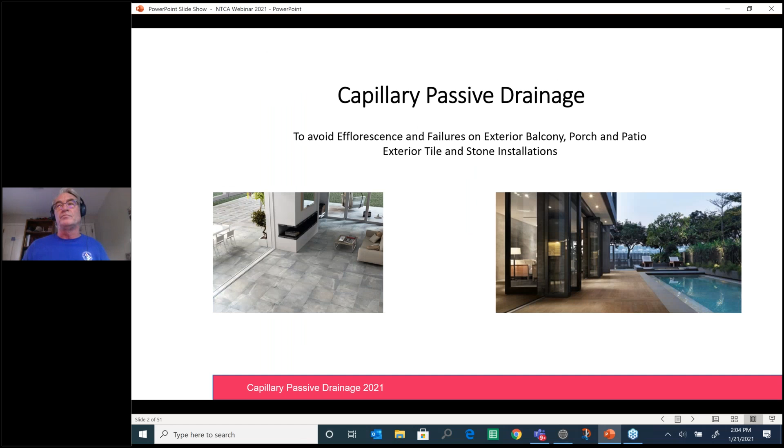To avoid efflorescence and failures on exterior balconies, porches, and patios, you want to make sure your installation includes a capillary passive drainage system.

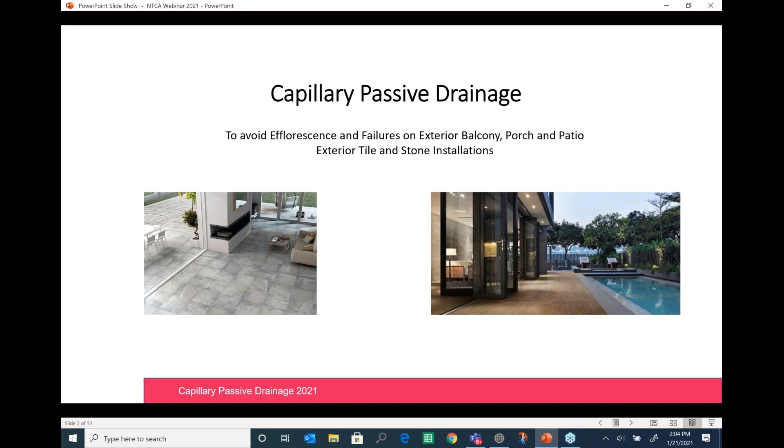Natural stone and porcelain pavers are popular choices for landscaping options, for patios, pool decks, sidewalks, and balconies. These installations will encompass porcelain as well as natural stone that are thicker than the traditional tile we would install on the interior. These tiles and natural stones are typically from 2 cm, which is 3/4 of an inch, up to 7.62 cm, or 3 inches.

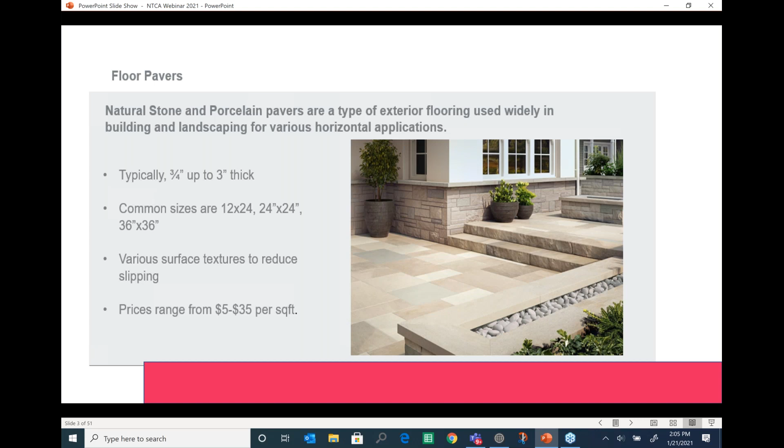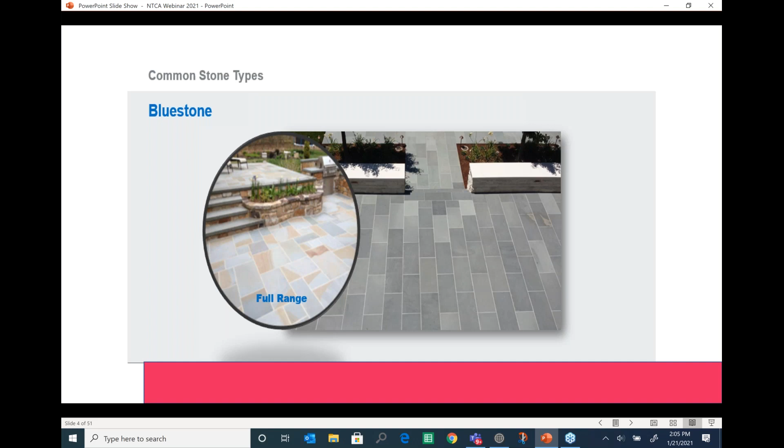Some popular options could include bluestone, quartzite pavers, as well as sandstone pavers.

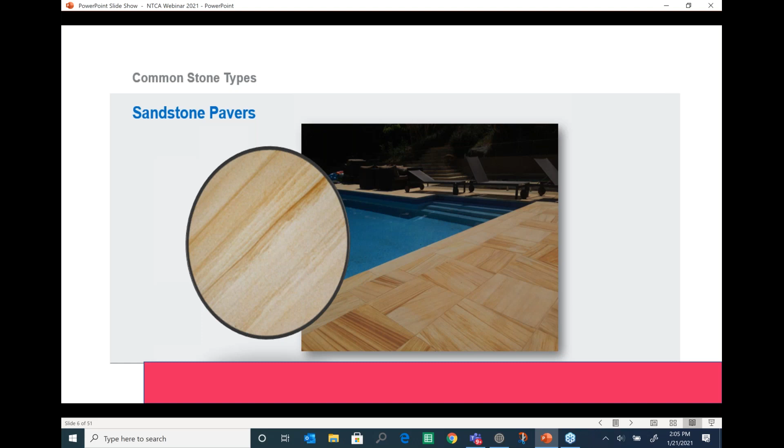Porcelain pavers are made from clay, sand, and feldspar. Porcelain is a very strong and dense material. It resists scratches and has a very low water absorption of less than 0.5%. The low water absorption restricts the amount of water that may cause freeze-thaw issues, especially in Northeast climates.

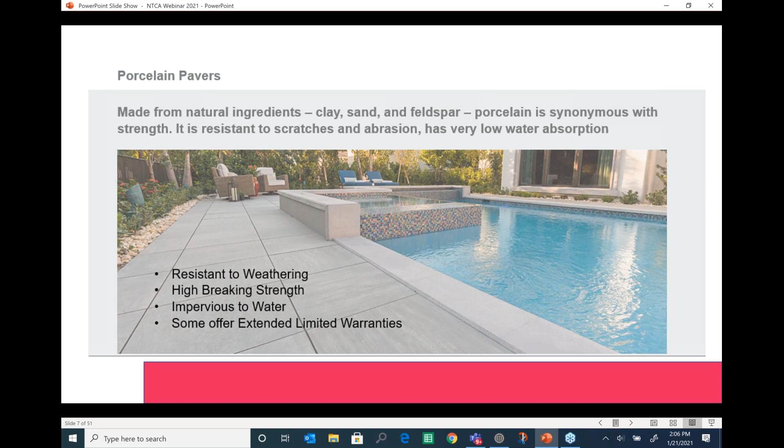COVID-19 has changed the way we use our homes. Today's homes are now our schools, offices, as well as family and entertainment spaces. Now more than ever, people are choosing to invest in outdoor spaces to increase the size and usable space for their current environments.

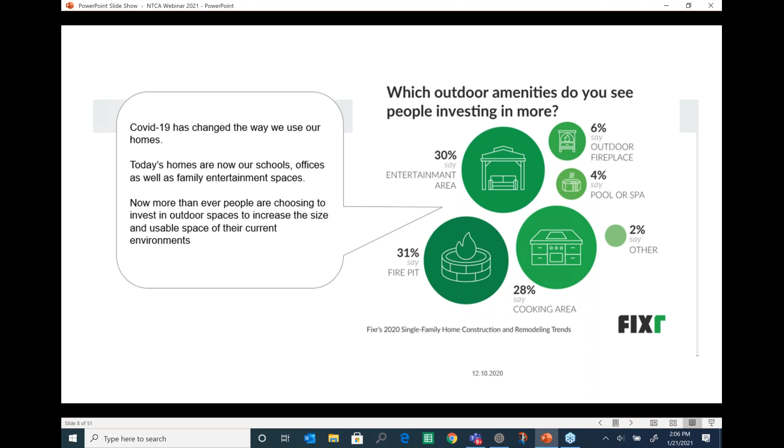The market is growing and rapidly changing. We continue to expand into outdoor living spaces. We're going to see an increase in 2 cm porcelain natural stone pavers. Also, large format tile is getting more common for exterior applications, not only for horizontal applications but also vertical applications. There's a growing request for fast and proven installation systems.

We're going to face some challenges. Most exterior tile and stone installation systems are inadequate and do not address many of the common challenges. Installation products and techniques vary by region and are not always suitable for harsh climates. There is limited education in the market that addresses these concerns.

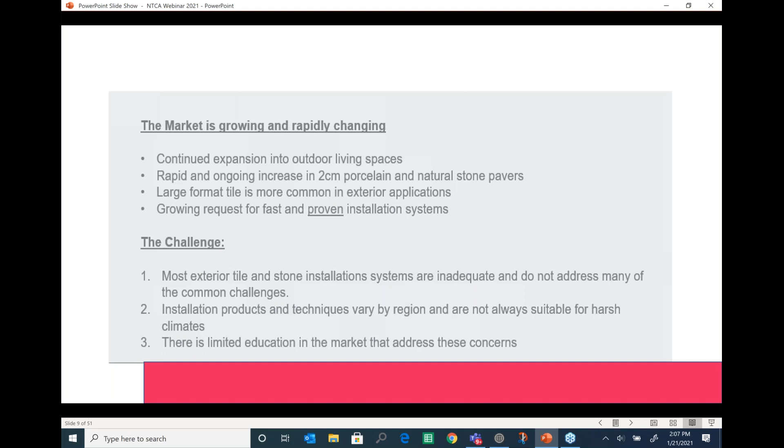Let's take a look at traditional installation options. We have the thin bed method, which uses a direct bond with a thin set mortar. We also have a bonded mortar bed—this is a dry pack bonded to the substrate with a slurry bond coat at a typical thickness of approximately 1/4 of an inch up to 2 inches. We also have an unbonded mortar bed, which is a dry pack installed over a slip sheet or cleavage membrane at a thickness of 1.5 inches up to 3 inches.

We also have the last option, which is a dry set or a sand and gravel installation.

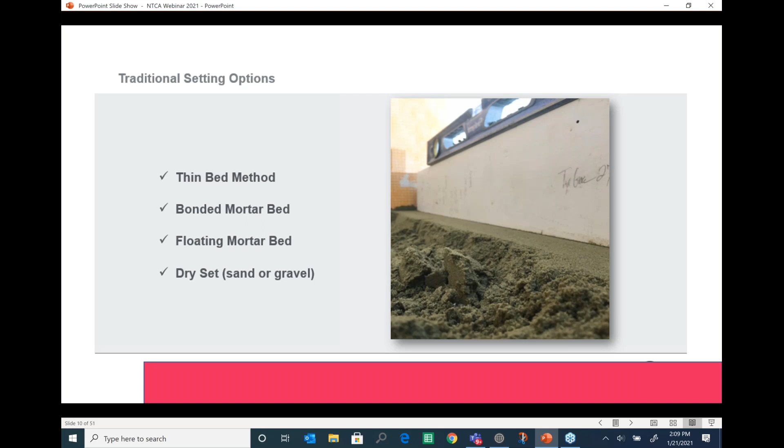The thin bed application, or direct bond method, is for slabs on grade construction where no bending, deflection, or stresses occur. A thin bed installation is desired for those types of applications. The substrate must be within tolerance and able to receive a cementitious adhesive.

Anti-fracture as well as waterproofing membranes are optional, and a lot of times they're overlooked. You always want to incorporate your movement joints according to the TCNA EJ171.

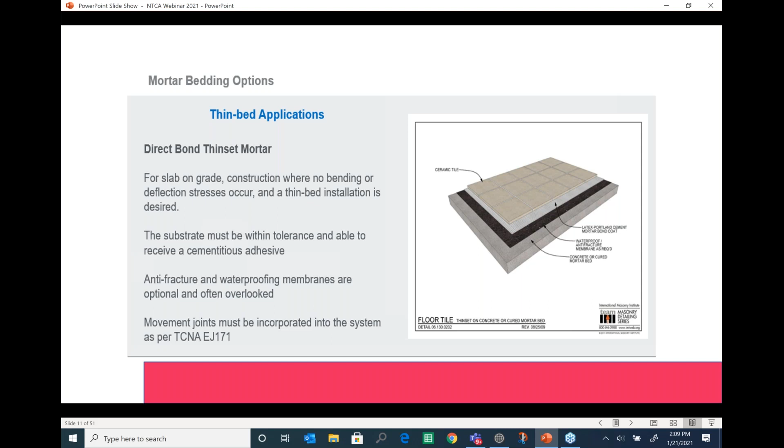For a bonded mortar bed application, you want to use it where areas need to be leveled, flattened, or contoured. A bonded mortar bed can go from thicknesses anywhere from 1/4 of an inch up to 2 inches in some cases. When floor flatness is critical, such as with pavers that have single edge dimensions greater than 15 inches, a bonded mortar application is critical.

Again, using an anti-fracture or waterproofing membrane is optional, but sometimes it should be considered to help the overall assembly of the installation.

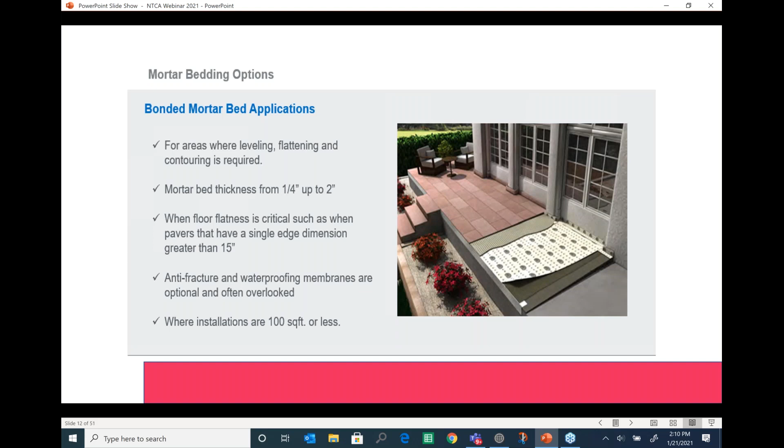There's also an unbonded mortar bed application when you have to go for a thicker installation to hit a certain elevation. Those mortar bed thicknesses range from 1.5 inches up to 3 inches, and sometimes thicker, depending upon the materials being used.

It's used for leveling, flattening, and contouring. You would use a slip sheet or a cleavage membrane to separate the mortar bed from the slab. It's completely unbonded from your existing substrate. Again, an anti-fracture or waterproofing membrane, an A118.10 or A118.12 product, should be looked at when installing these types of stones outside over either a bonded or unbonded mortar bed.

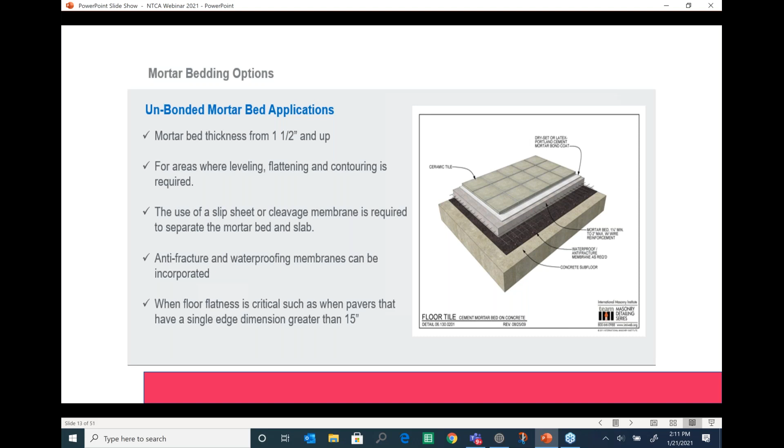So there's two types of mortar beds that we just talked about, and you can do them in a couple different applications. You have the float and cover, where you pull your dry pack or your mud, smooth and finish, and let it harden, then come back later and install your stone or tile. If you're using a porcelain paver or a stone that is very flat and gauged, this is a very common installation practice, using a float and cover application.

A wet set, or live set, is usually used when you're using a larger stone or an ungauged slate or another type of stone, where setting the stone into the wet, live mud and beating it down to a certain level is required to get that floor or finish flat and level.

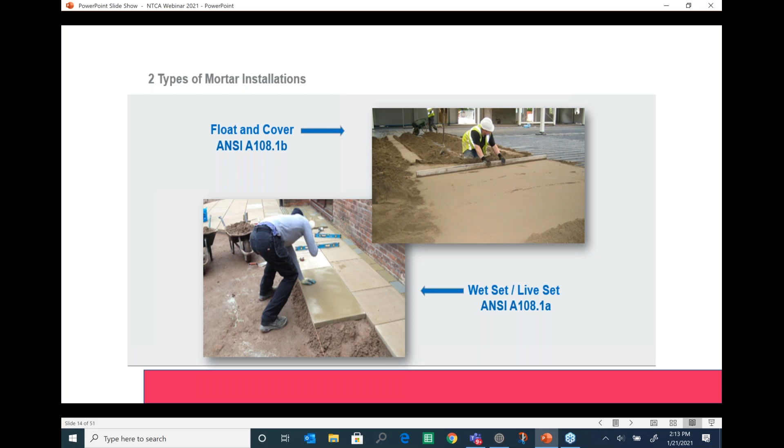Also, you have the dry set method. Here are two examples of a dry set method. These are typically used for landscaping applications out in the yard, where you either take gravel and apply your paver right to the gravel, or compact your gravel and put a layer of sand on top that you screed off to a certain flatness and elevation, and then install your pavers.

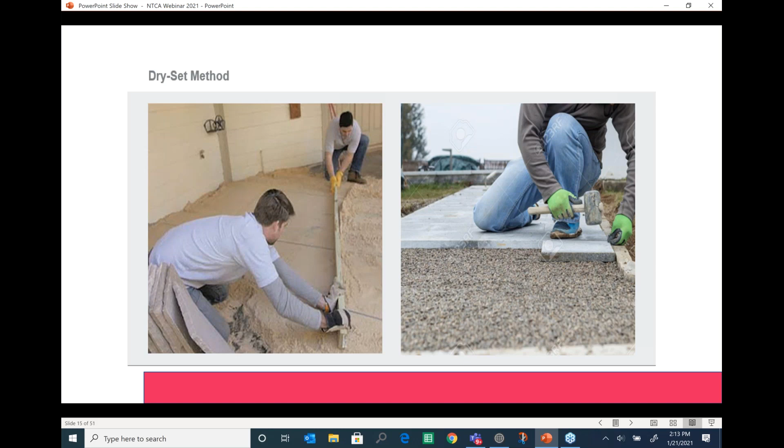So when we're talking about exterior installations, we have to take into consideration expansion and contraction issues. A screed can expand twice as much as a ceramic tile.

With surface temperature changing dramatically, from possibly having a nice sunny summer day and then a storm shows up and the rain comes down, you can have a dramatic difference in surface temperature in a short span of time. And what happens is your substrate, which includes your tile as well as your mortar bed or concrete substrate underneath, will contract as that substrate cools down.

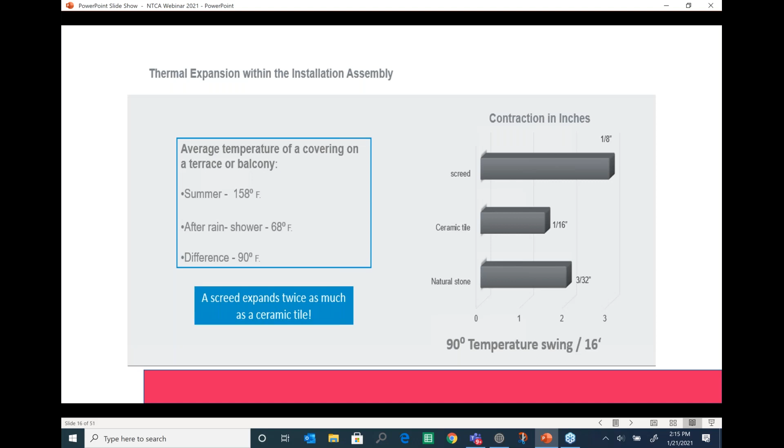So you must have accommodations for movement joints in your installation to allow for these substrates to expand as well as contract. Most of us have seen the yardstick example of a substrate shrinking or contracting, causing the yardstick to rise up in the middle. Well, this is exactly what happens when a tile assembly shrinks as well.

You will get tenting of your tile or stone and delamination. This is common for exterior applications. That's why you have to take the necessary installation practices, as well as your soft joints and movement joints, into consideration when you're planning out your exterior project.

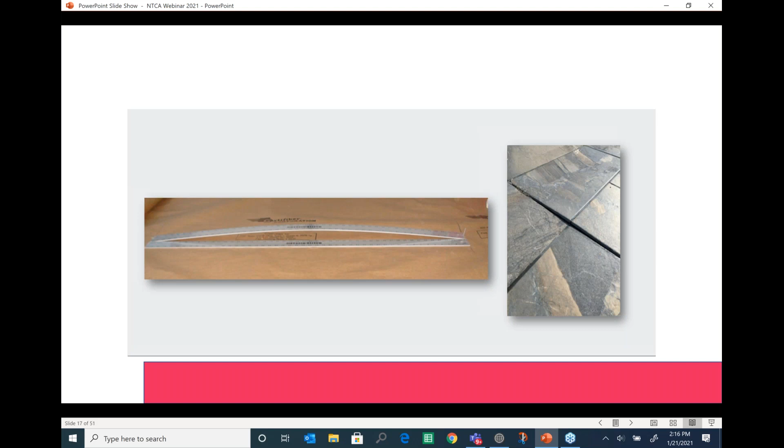Older installations included smaller tiles that offered more joints to help accommodate movement. However, the trend towards larger format tiles with less and smaller joints has increased the complexity of exterior tile installations.

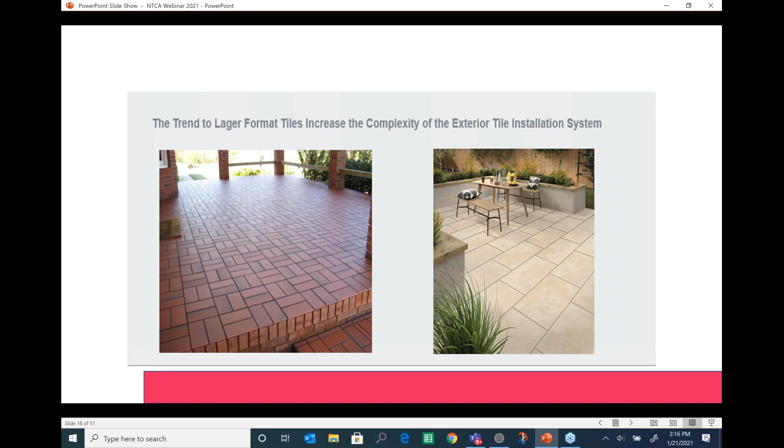Larger porcelain tiles equate to less joints, which means less expansion room, which increases the risk of cracking, heaving, and disbonding.

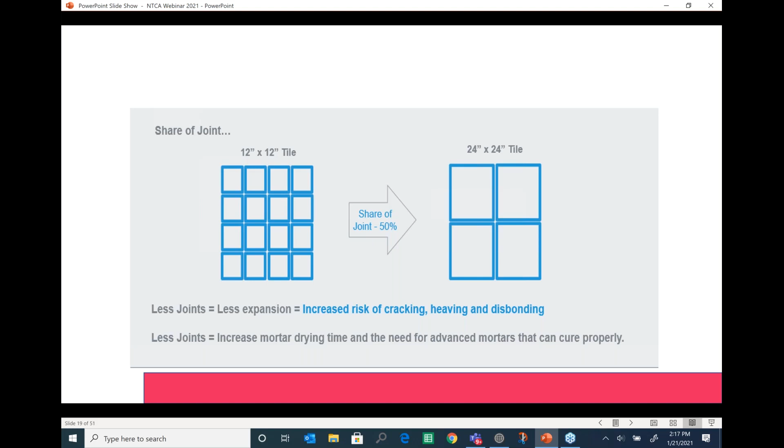When we look at other environmental effects on a tile assembly, we must also consider the combination of moisture and heat and how they negatively affect a tile and stone application over time.

When it rains or even when it snows and the snow melts, that moisture is going to get into your grout joints, penetrate the assembly, and sit in the cement, the grout, the substrate, and unless there's a good drainage mat in place, that water is just going to sit there. Some of it will evaporate, but most of it's going to just stay there.

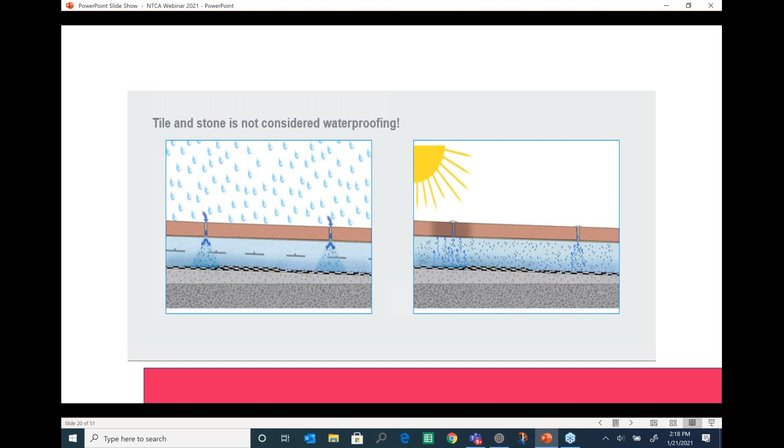Then what happens is when the sun comes out, it's going to basically cook that installation, causing that water to come to the surface and bring all the soluble salts with it, or efflorescence.

Even when an assembly has drains in it, if it's not set up properly to direct that moisture to the drain, then it's just like not having drains at all.

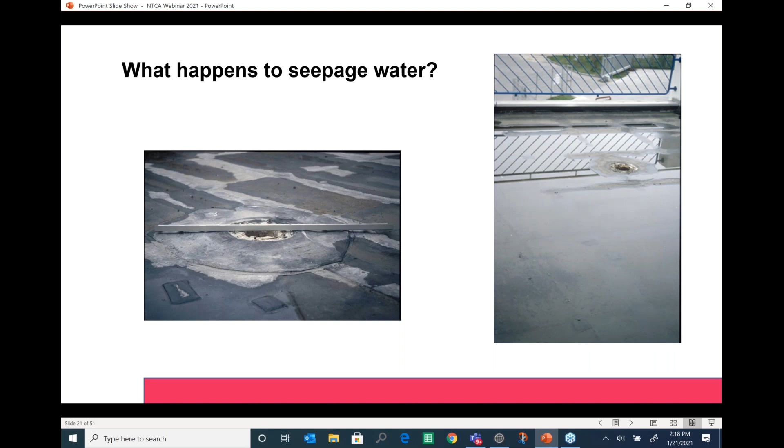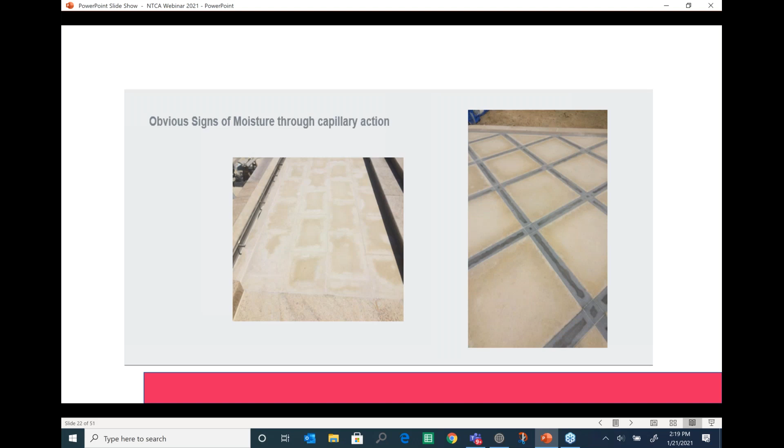This is what happens when that moisture is trapped underneath a natural stone. We see ghosting, we see moisture stains, we see efflorescence.

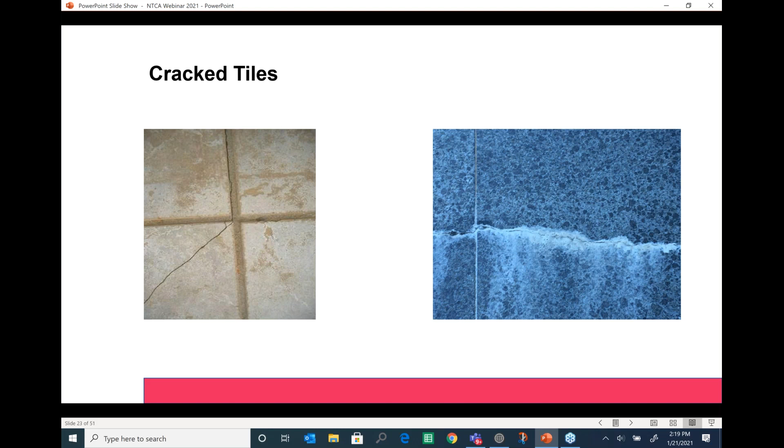Freeze-thaw effects of that moisture being trapped also cause tile and stone to crack. In most cases, an unsightly white efflorescence will come up through the joints to the surface of the finished tile.

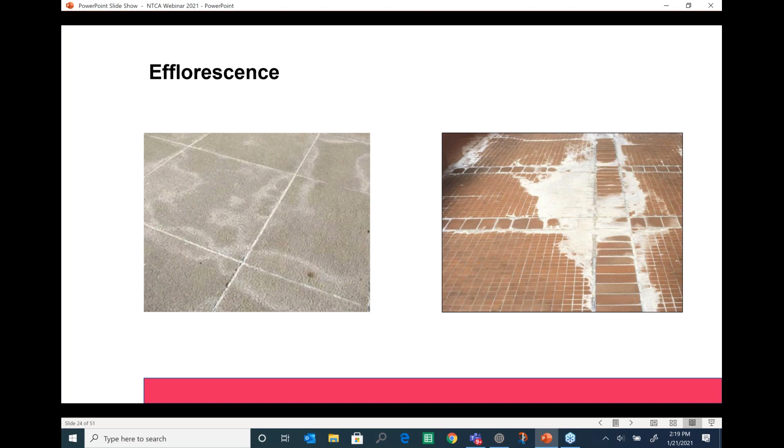Here are more examples of moisture trapped in the assembly. There's a large investment in these types of installations. To have a finished look like what's shown in these pictures would be devastating for a homeowner or building owner after they spent a lot of money to have their dream exterior patio built.

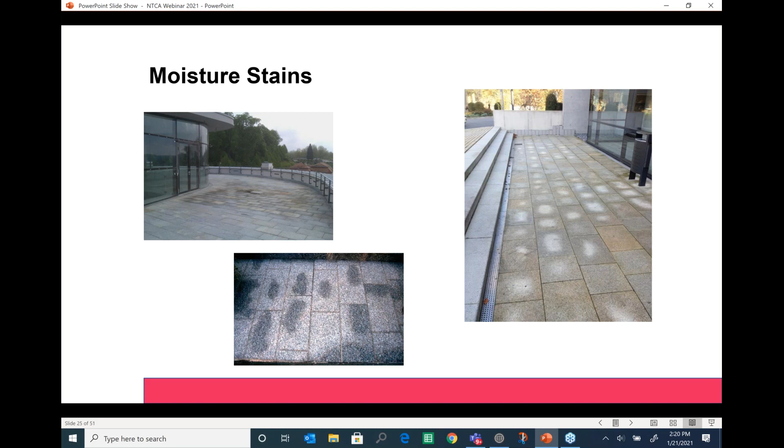If you have an open joint installation and that water's trapped, then this is possible. Another unsightly situation.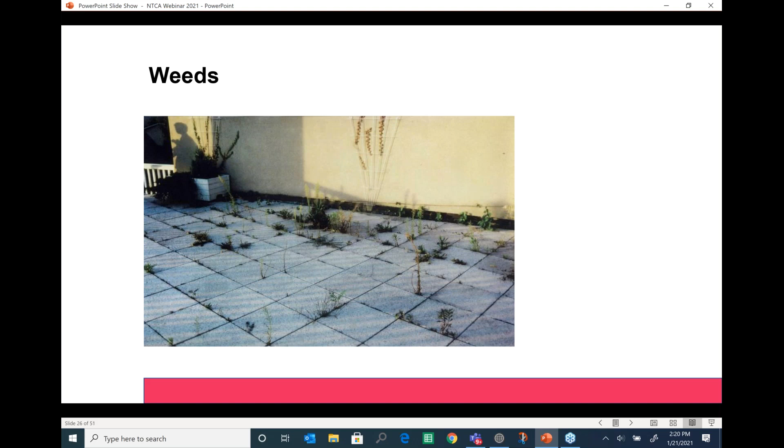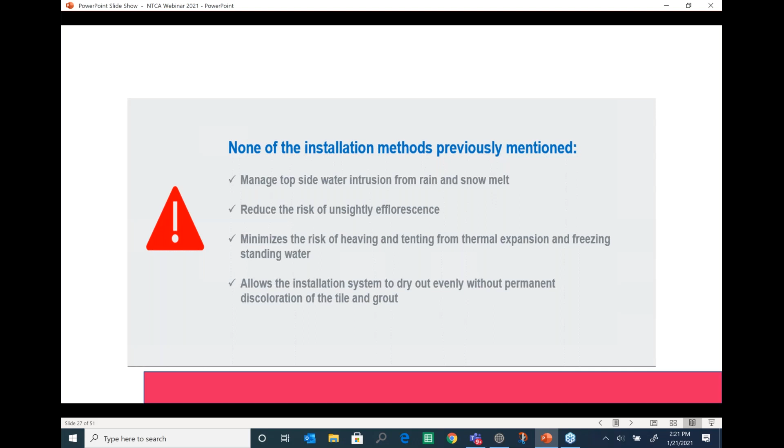So none of those installations that we spoke about manage topside water intrusion from rain or snow. They don't reduce the risk of unsightly efflorescence. They don't minimize the risk of heaving and tenting from thermal expansion and freezing standing water. They don't allow the installation system to dry out evenly without permanent discoloration of the tile and grout.

If you choose not to manage the water, be prepared to manage the maintenance.

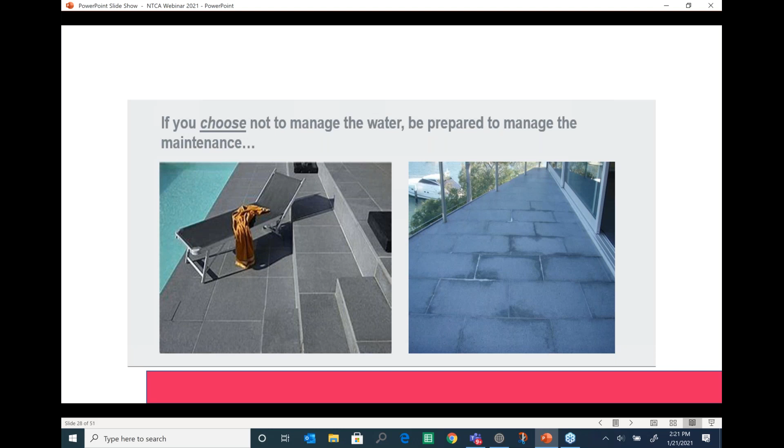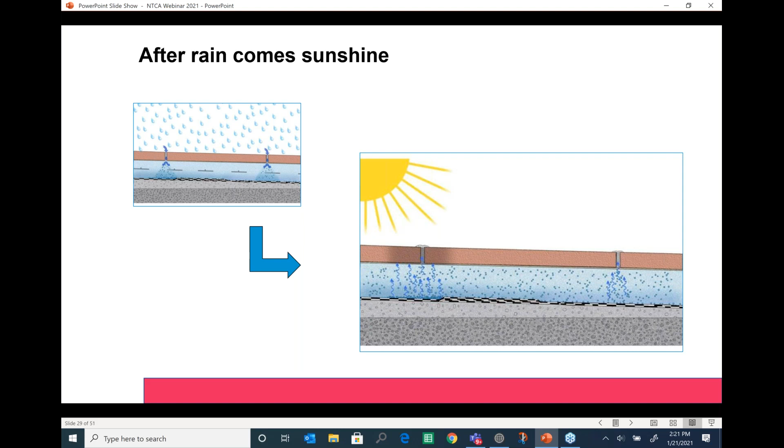Again, another example of after the rain and then the sun driving that moisture to the surface right through the joints.

When you have a proper capillary passive drainage system in place, along with a properly sloped substrate, there is no excess moisture that is driven to the surface. This is a picture of a capillary passive drainage mat under a mortar bed.

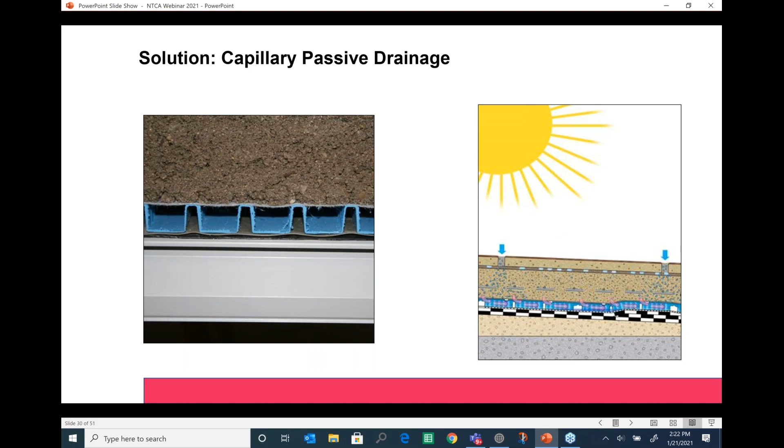The basic features of a drainage mat are comprised of a topside fleece that creates a defined space between the substrate and the covering, and a bottom side drainage channel that also offers load distribution.

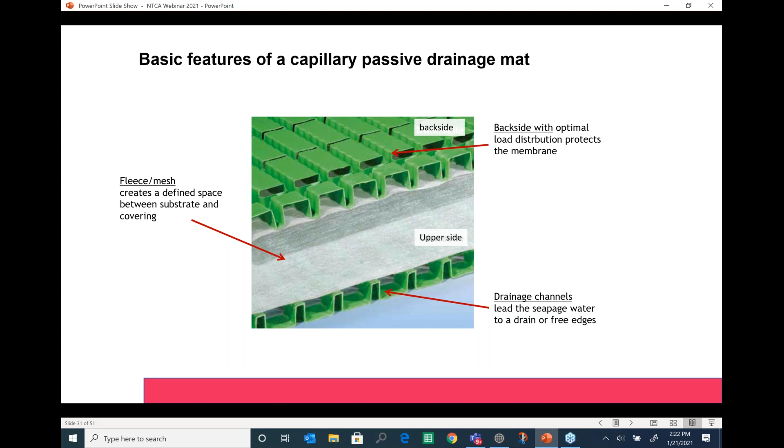To increase the safety factor, you would also include a drainage mortar. A drainage mortar is comprised of larger aggregates and a Portland cement that has hydrophobic properties. This is especially important when the substrate may not have great slope.

A drainage mortar, which looks like a Rice Krispie square on your right, will not allow the water to wick back up through the assembly. So the topside water will drain through the drainage mortar much quicker than a traditional mortar, but it will not allow capillary activity or wicking of that water to work back up.

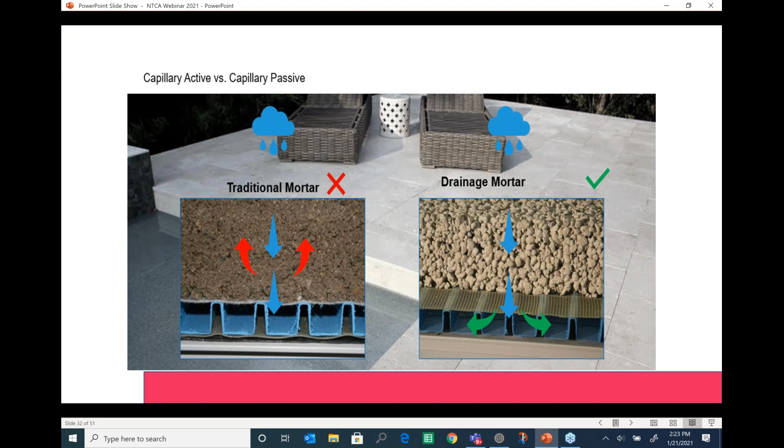A standard sand and cement screed is capillary active, which is on the left. A drainage mortar, on the other hand, is capillary passive, again allowing that moisture to pass through, but not wick back up through the assembly.

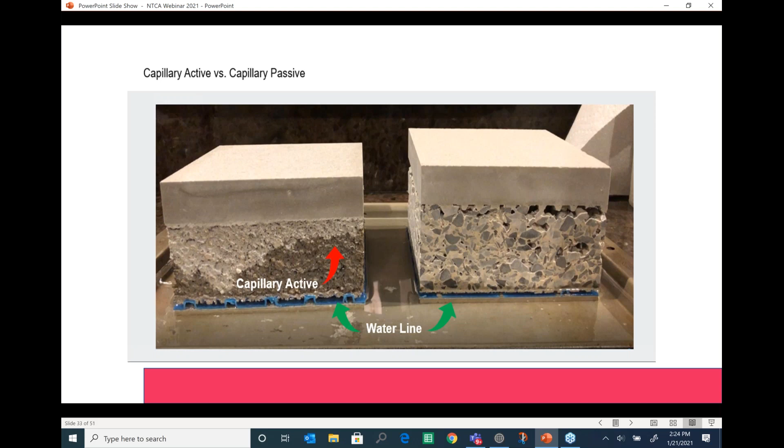The following picture is a good example of a capillary passive drainage system. You're going to have your substrate. You want to put down a waterproof membrane. What this does is help prevent any efflorescence that's maybe in that existing substrate from coming up through the assembly as well. Then you're going to have a loose laid drainage mat, a mud bed, which is your drainage screed, typically 2 inches in thickness, and then your porcelain tile or your natural stone.

You incorporate a drain grate at all the doorways, and you have an option for either a drip edge profile and/or a gutter system at the end of the balcony.

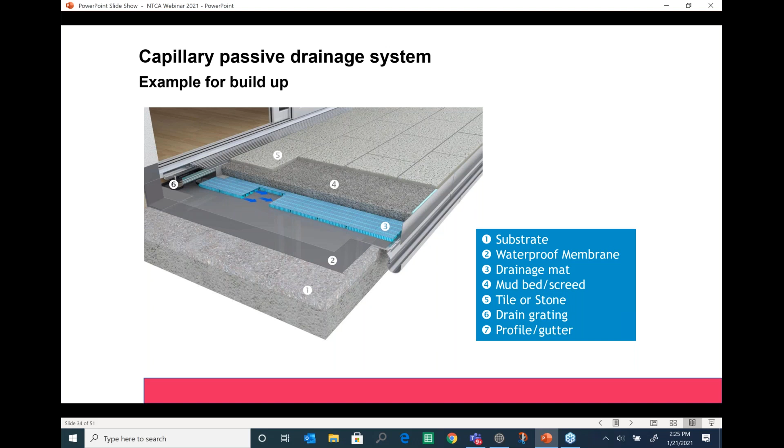There are a couple options for installing porcelain tile or natural stone over a drainage mat.

Utilizing a drainage mortar on the left for balconies, terraces, roofs, or decks, we're going to use a porcelain tile or a natural stone. But again, that drainage mortar is going to be a minimum of 2 inches thick, so you must have enough space to accommodate this tile assembly on your deck or patio. The minimum height that you would need is 70 millimeters or 2.8 inches.

Installing 2 cm porcelain pavers or 3 cm natural stone with a direct point adhesion method, sometimes called a cement pedestal method, is the second option. You can also use this on balconies, terraces, and roof decks as well. You have to use porcelain pavers that are a minimum of 2 cm or natural stone that are a minimum of 3 cm to support the weight on the direct adhesion of the pedestals. The minimum height is much less though, 30 millimeters or 1.2 inches.

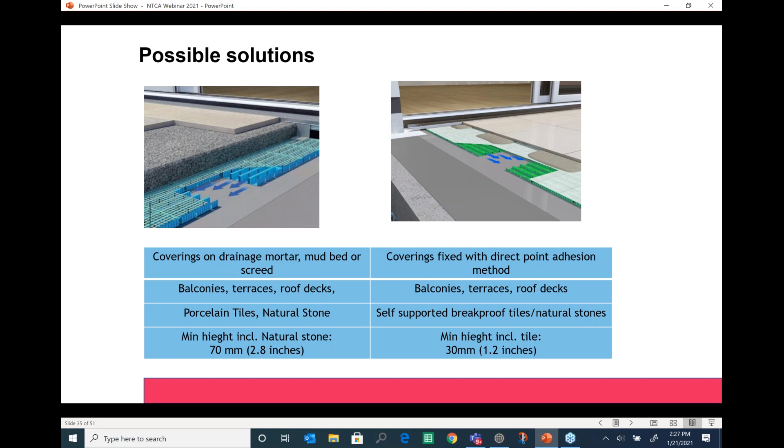So let's take a closer look at these two systems.

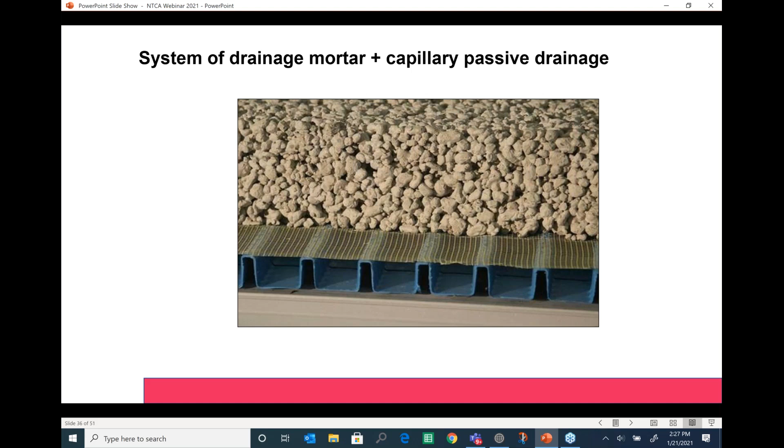Again, you're going to have a waterproof membrane, your drainage mat, your drainage mortar, your porcelain tiles, or your natural stone.

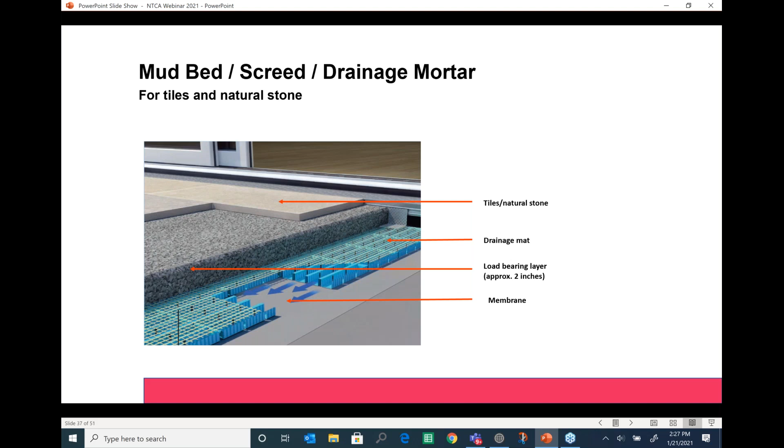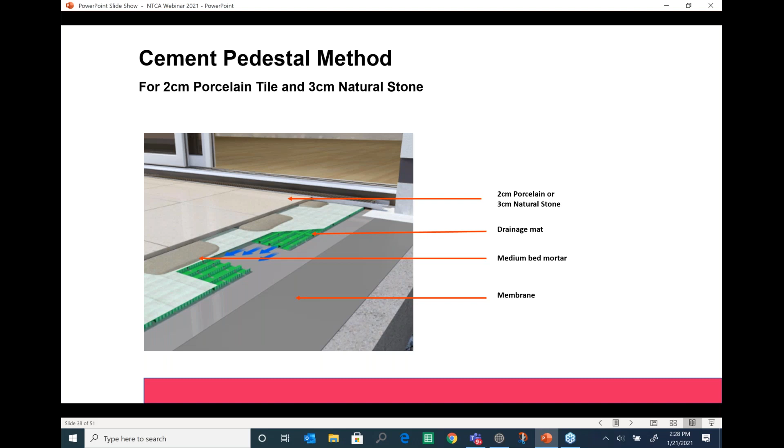For the pedestal system, again, a waterproof membrane, your drainage mat, a medium bed mortar or large and heavy tile mortar, and 2 cm porcelain or 3 cm natural stone.

Some of the benefits of these capillary passive drainage systems are they reduce the likelihood of efflorescence. They can accept a wide range of tile, pavers, or natural stone. They can accommodate a buildup to meet a threshold. They allow grout joints between the tiles. They shorten the drying times after rainfall, and they allow for fast drainage of the moisture or the water.

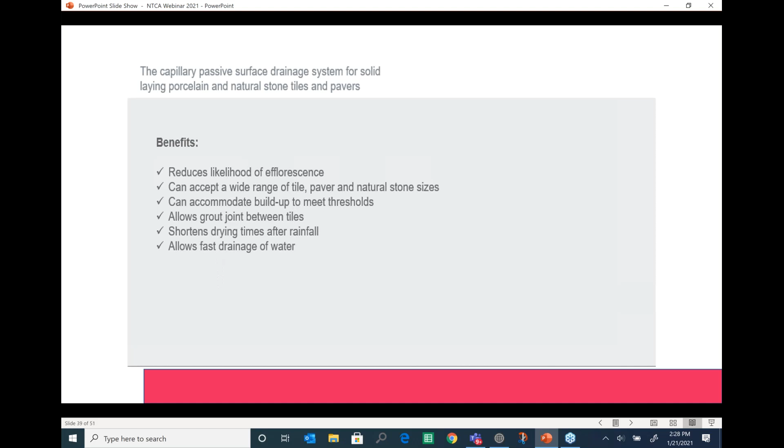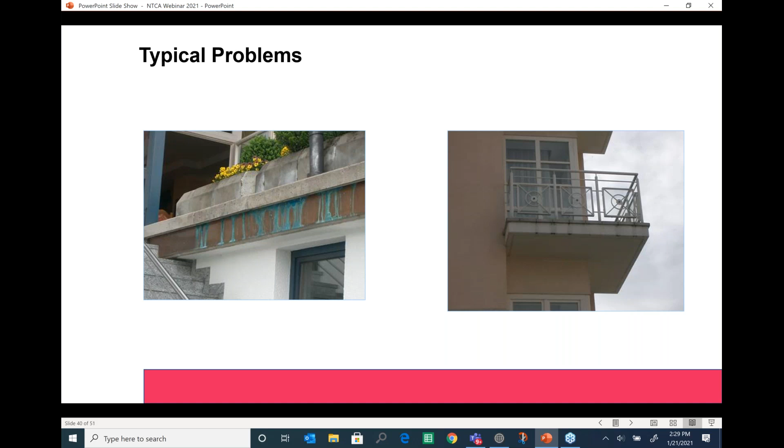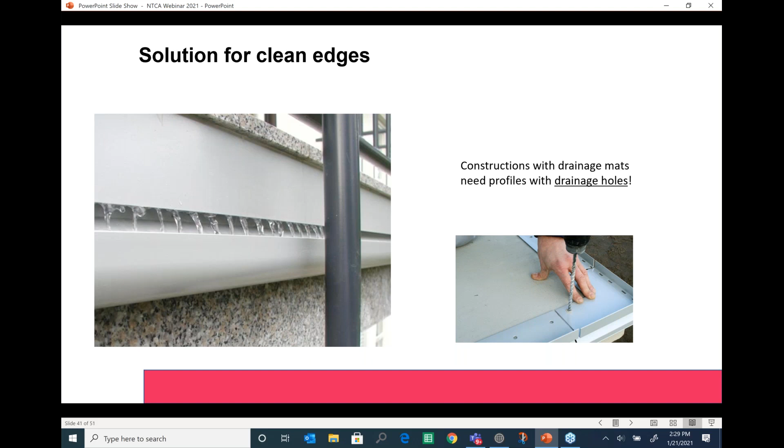There are clean, attractive drip edge and gutter solutions to eliminate these types of problems. Here's an example of a completed install with a manufactured drip edge.

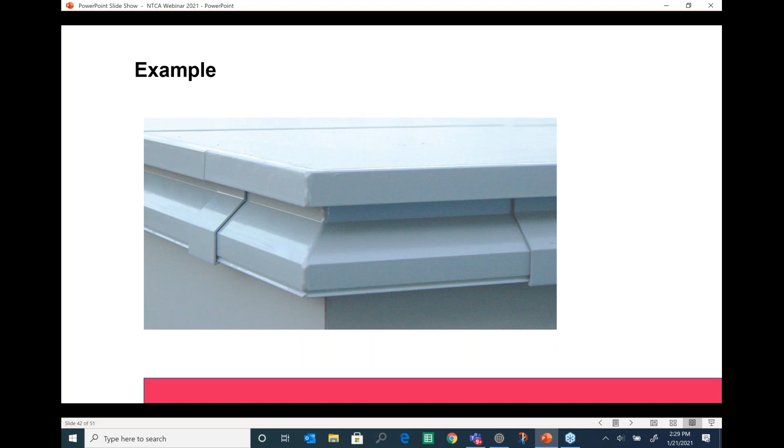For on-ground installations, a profile is used to protect the side of the drainage mat from the compaction of the soil. You want to keep those drainage mats open to allow that moisture to pass through. It's always a good practice to also put stones around the edge too, to allow the moisture to drain properly away from the yard.

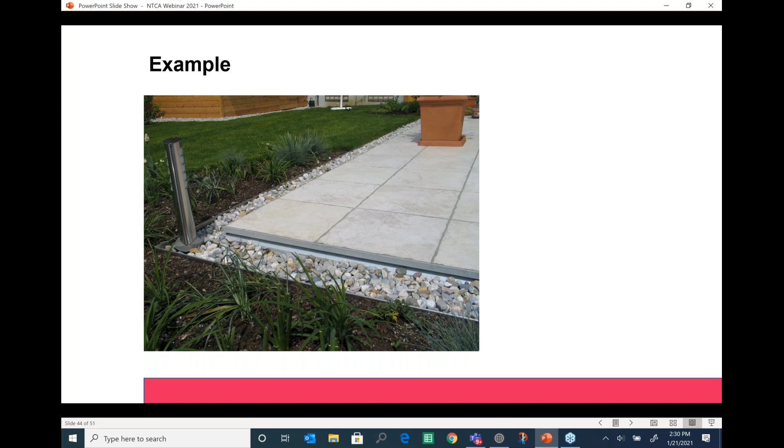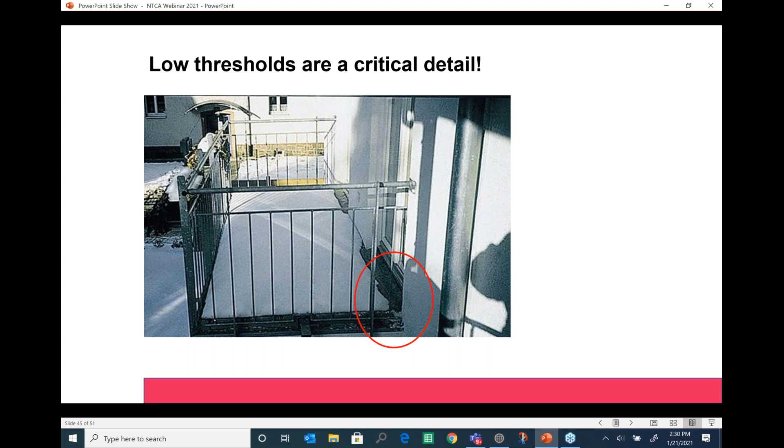Low thresholds or steps is critical on a patio or a deck. Water can seep into a house or a building with a low threshold, causing finished flooring damage, or even in some cases, mold that gets underneath the floor system.

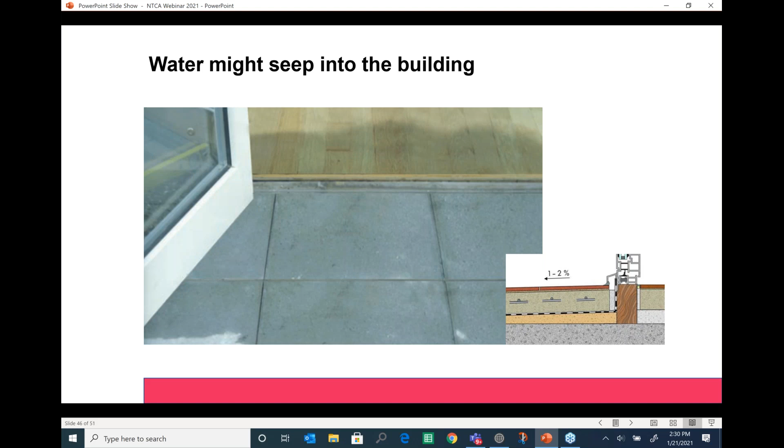By installing a drain grate that is connected to the drainage mat, this alleviates this problem and gives an attractive finish.

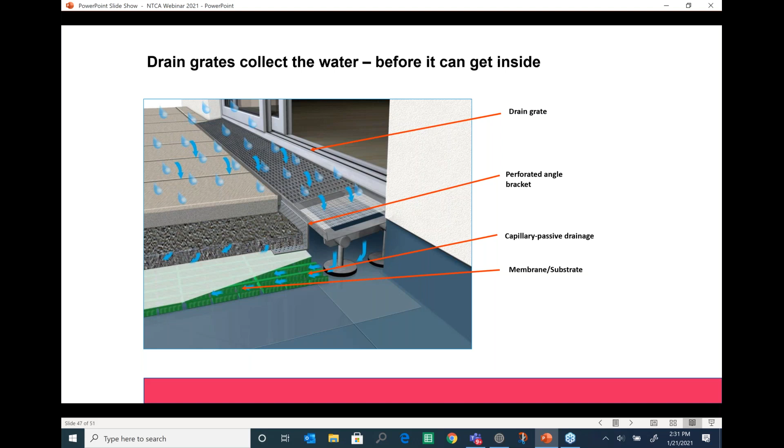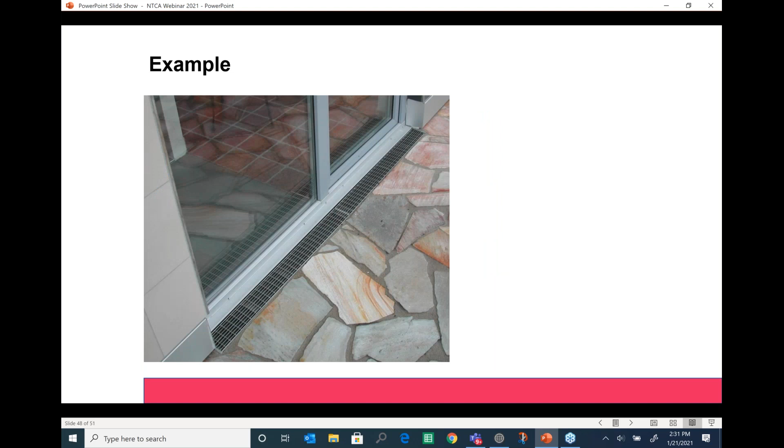So, some basic aspects to consider when laying coverings on decks and terraces: the membranes and coverings should have sufficient fall of a minimum of 1% to 2%. You want to manage the seepage water with capillary passive drainage mat. You also must consider enough movement joints in the tile assembly.

It's always important to choose the right adhesive at the right time. Take into consideration the geographical location of your installation when making your selections of mortars and grouts. Be sensitive to low thresholds in areas with heavy rain, snow.

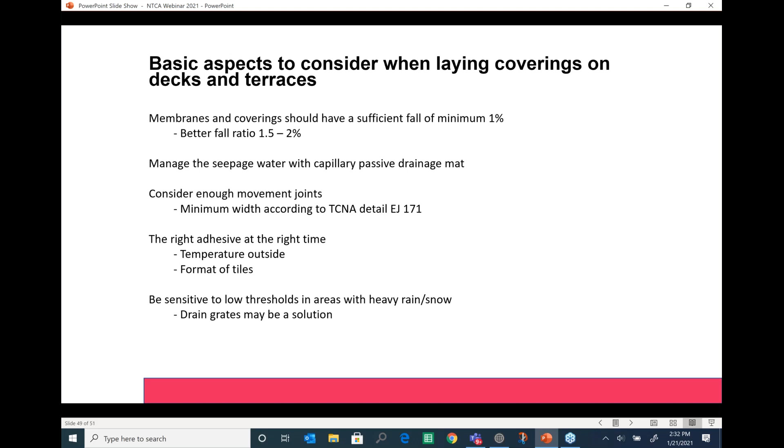So to summarize, coverings on balconies and terraces are not waterproof. Seepage water is going to leak through. The backwater on the membrane or in the mud bed passes through the capillary system and the mud bed, the adhesive, the screed to the surface together with lime, resulting in efflorescence, frost damage and causing stains.

Capillary passive drain mats create a space between the seepage water and the construction, so damages are prevented. The ventilation helps dry out the construction. If drainage systems are used, water must be able to rinse off the free edges. Profiles with drainage holes are recommended.

Low thresholds bear the risk of water leaking into a room, leading to failures. Drain grates in front of doors and window channels channel the rainwater and prevent damage.

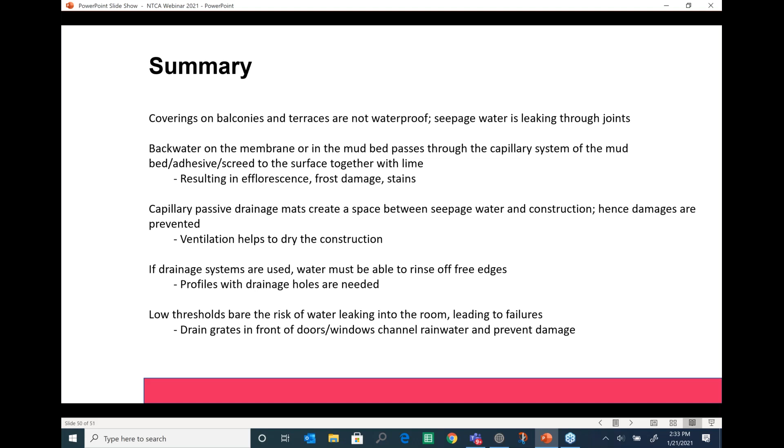Thank you, and I'll take any questions you may have.

Mark, great presentation. Appreciate it. Well done. Believe it or not, you did such a great job. We don't have any questions. We have one comment, from someone who is very technical, who said that nowhere in ANSI does it mention anti-fracture. It is crack isolation membrane. So there you go. Just for future reference. Other than that, it was very educational. We had a great audience, a lot of people here, and you did such a great job. There are no questions or anything that we really need to discuss. I want to thank everybody for attending. We had around 85 attendees.